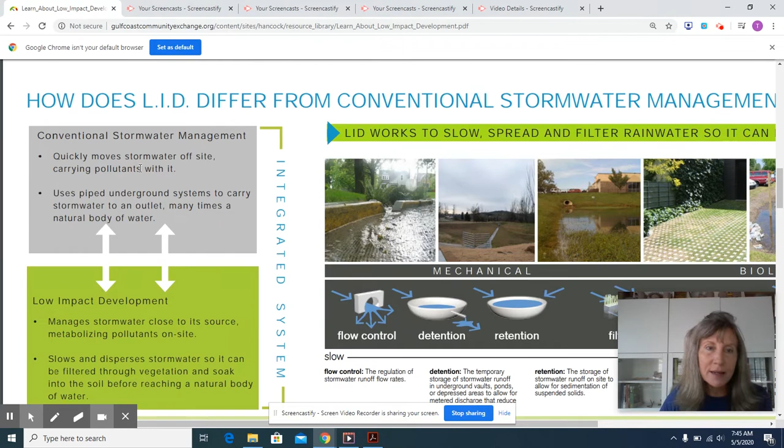So how does low impact development differ from conventional stormwater management anyway? Well, if we look at this chart over here, you see conventional stormwater management quickly moves stormwater off-site, carrying all those pollutants that we just talked about with it. Conventional stormwater management uses piped underground systems to carry stormwater to an outlet. Many times, this goes directly to a natural water body.

In contrast, though, low impact development manages stormwater close to its source. Many designs are such that the stormwater is completely managed on a site and never affects neighboring sites. And the process metabolizes those pollutants on site rather than moving them off to our natural water bodies. We do that by slowing and spreading out stormwater so that it can be filtered through vegetation, and thereby it has time to soak into the soil before reaching a natural body of water.

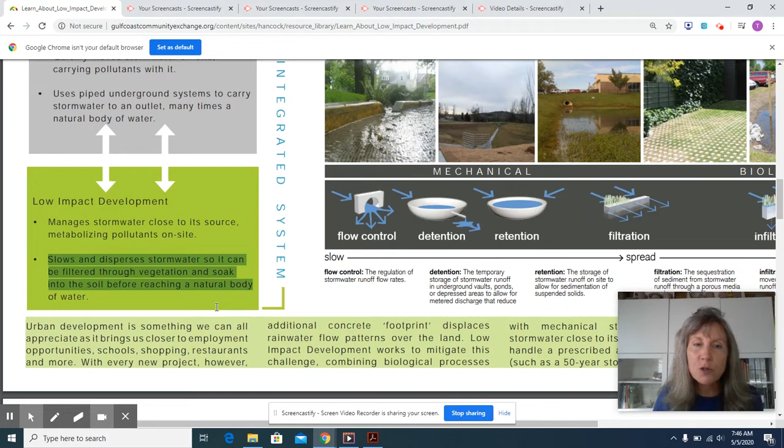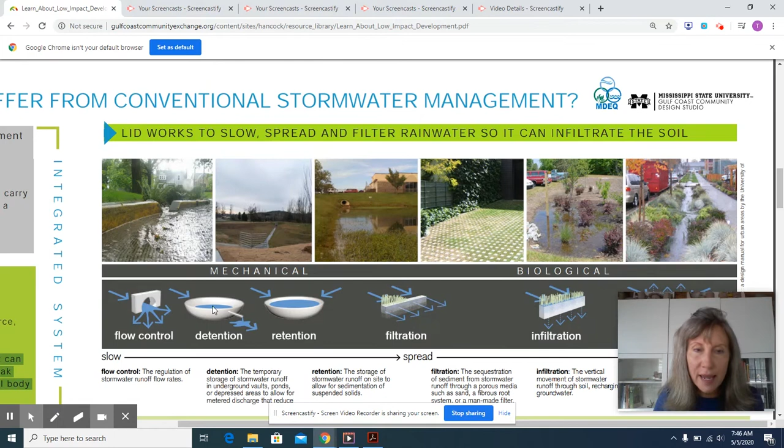So these images show how many times we use mechanical systems together with more biological solutions in low impact development. And you can read more about the different types of mechanical solutions versus biological solutions. But basically, there's the opportunity to control the flow through mechanical solutions, to detain water for a period of time, to retain water indefinitely.

Or we can move toward filtering water through the landscape so that it can infiltrate downward into the soils. And then in the most intense biological solutions, the rainwater is actually treated by applications such as constructed wetlands.

So we all see the value, I think, of urban development, and we can appreciate how that brings us closer to the places we like to go. But at the same time, with every building that goes down, with every new shopping mall, with every new street that goes in, that building footprint, we call it, displaces water and displaces the natural hydrology of the landscape. And so low impact development offers solutions to manage our stormwater while also continuing to grow our communities.

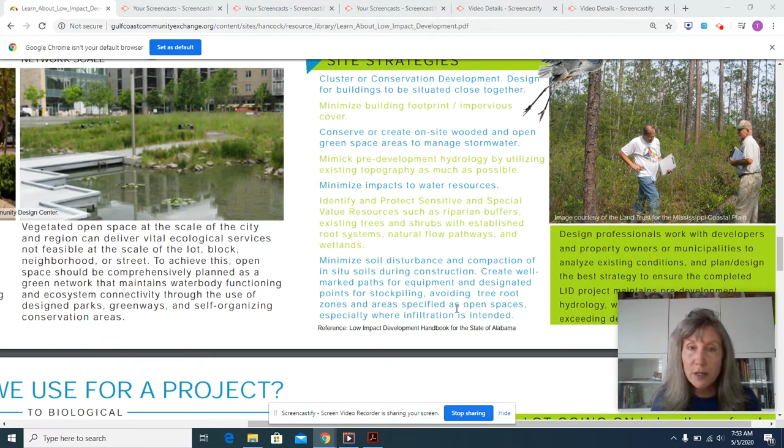Another site strategy is to minimize any soil disturbance as much as possible and minimize compaction of soils that are already in place during the construction process. In the construction process, we create well-marked paths for equipment and designated points for stockpiling, so that the construction process doesn't put pressure on the existing trees and their root systems, because those root systems are extremely important to managing our stormwater.

So once the site has been thoroughly evaluated, we go to a kind of a toolkit of low impact development tools and think about which tools are best for that site. And it's always different for each site.

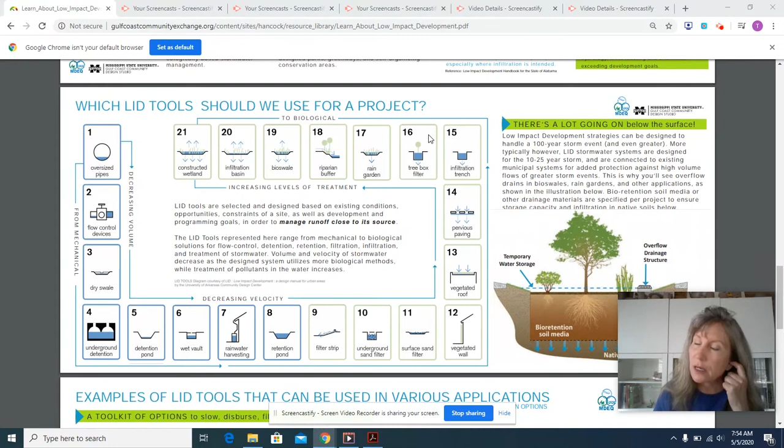This diagram shows many of the tools that are used in low impact development, and they range from the most mechanical, such as oversized pipes and flow control devices, to more biological solutions, such as vegetated filter strips, green roofs. Here's a pervious paving diagram, but the most biological solutions are in the form of rain gardens and maintaining riparian buffers, designing bioswales, infiltration basins, and, like I spoke of earlier, constructed wetlands.

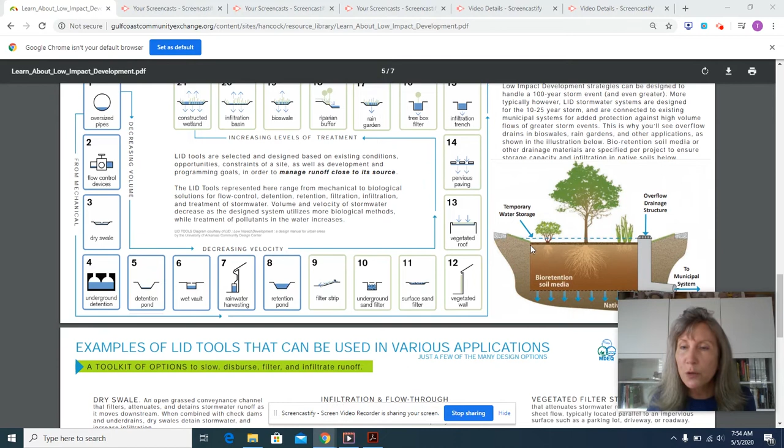But it's important to understand that if you see some of these applications used in real life, you might see what's going on the surface, but it's important to know that there's a lot going on below the surface. So this particular design is designed for a certain stormwater level, but when stormwater exceeds that level, it'll go into an overflow pipe that will carry it to a municipal system. And the soils are structured such that they will hold the stormwater for a certain period of time until the native soils dry up so that they can receive the stormwater.

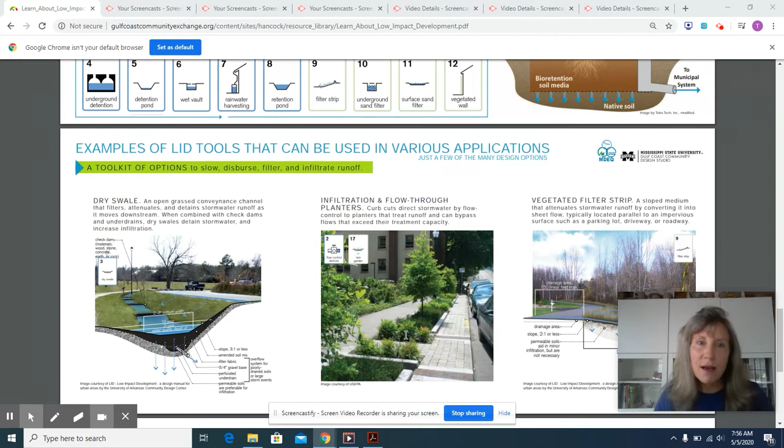Okay, so now here are some more pictorial examples of some of those low impact development tools that can be used in various applications. So here's a dry swale, which means it's designed to be dry at some times and wet at other times. Beneath the surface, this is all very intricately designed so that the water that this swale holds in super rainy seasons will infiltrate the soil. This particular one comes with a series of check dams, which work to slow that stormwater down even more than the grassy areas would as it's moving downward in the swale.

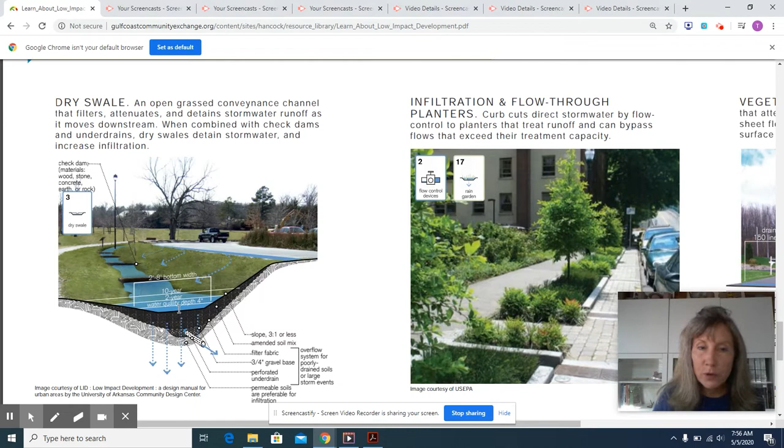These are infiltration and flow-through planters, but the water gets to them off of the road. As stormwater runs down the road, these curb cuts allow water to enter these flow-through planters, and so rather than just piping that water underground, we can pipe it into beautiful planted areas that create nice walkways for people. As these trees grow up, they'll provide shade for people. But not only that, this vegetated area creates a nice buffer between the pedestrian and the street.

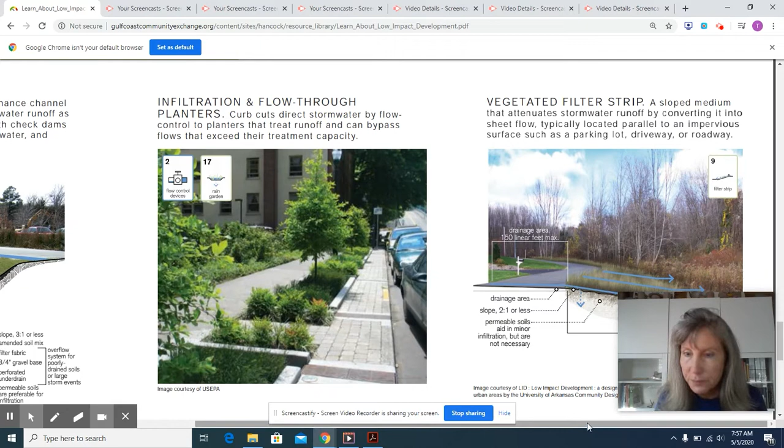And then lastly, I'm not sure you can see this one very well. Yeah. So the vegetated filter strip is another example. And this is a good example to be used in a golf course or a park, or you might have seen this along a running path that you take. But basically the landscape is sloped toward a lake that's not shown in this picture. And the rainwater will sheet flow across this lawn area, and it'll continue to slope over this path.

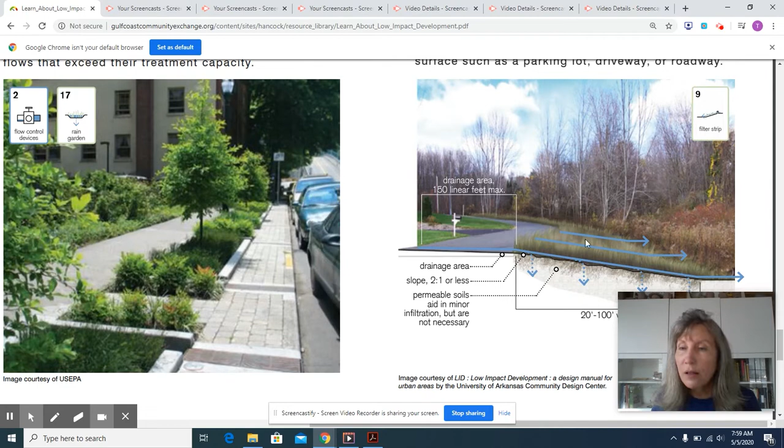And this planted area is designed so that as the rainwater travels down this slope, this grassy area is filtering the water. And you see it's really kind of filtering it horizontally through the landscape. And then the grass gets even denser before the water body. And what that means is once the stormwater gets to the water body, any fertilizers that are used, any pollutants that are collected up here on the walkway or the roadway, all of that's filtered before it gets to the body of water.

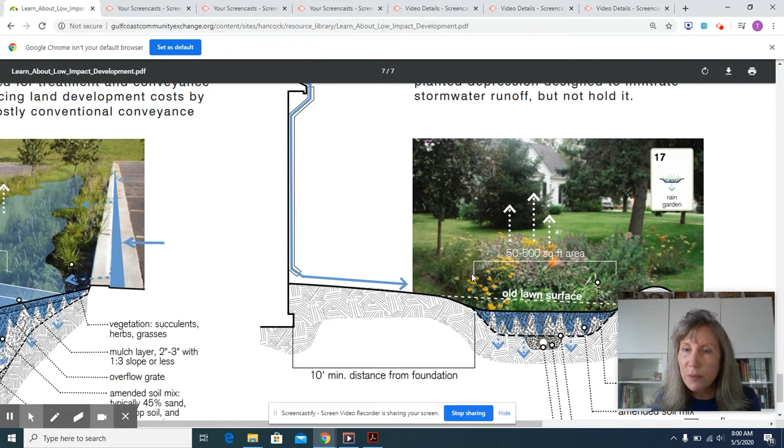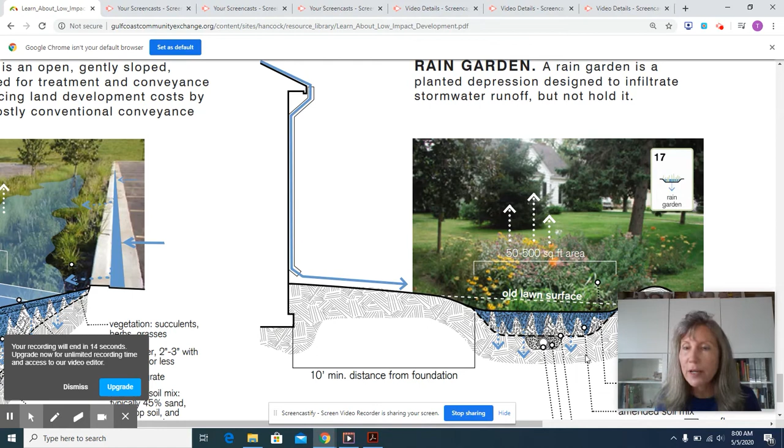And then here's an example of a rain garden that collects water from a rooftop down through a gutter system, and the water is directed toward a depression in the landscape, which can be planted with plants that love water. We call them plants with wet feet. But again, even below the surface, there's engineered soil that is specifically engineered to hold water, and there's a certain amount of gravel, and this will all hold the stormwater while giving it time to infiltrate those soils and thereby not flooding this overall landscape.

Okay, so that completes the 7-page tutorial. Now just go back to your outline and work through the rest of the outline, and be sure to submit by May 15th. We can't wait to see what you come up with.